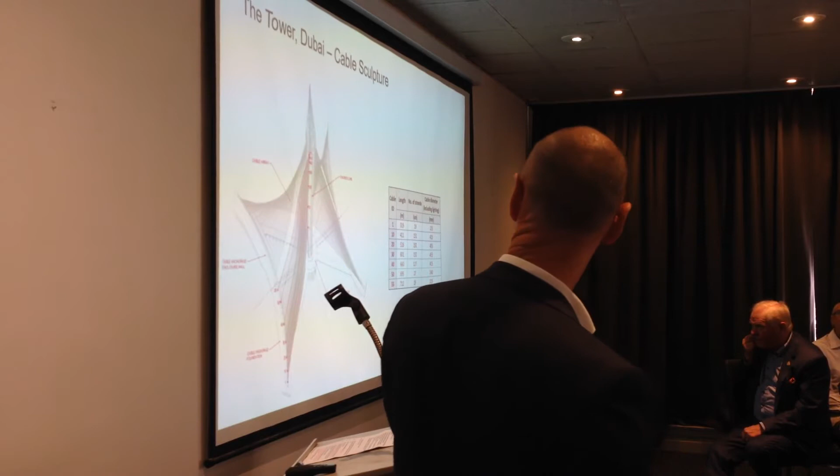There is a lot of plant and equipment, there's a lot of safety spaces, lift houses and the like. The bud section is around about the equivalent of a 50-storey building. And there are 2 floors up there that are unallocated. I suspect that will be a penthouse for the royal family. This is a bit of a complicated diagram. The point I wanted to make is about the sculptural work done by Calatrava in creating the form of this structure.

There are 208 cables that support the tower. So the tower is a bit like a lollipop in a way. It has a very thin shaft, and then it has a larger section on top, and it has 208 steel cables holding it up. It's a bit like a suspension bridge, but vertical.

And those cables, as I've tried to show in red, are placed actually not to make it more stable, but completely due to aesthetic desires. So Calatrava actually placed all of these cables to look like a harpsichord that had been bent out of shape, and secondarily so that images could be projected onto the array of cables, so that standing about a kilometre away you would be able to watch a movie on the cable array, and I'll show you something about that later.

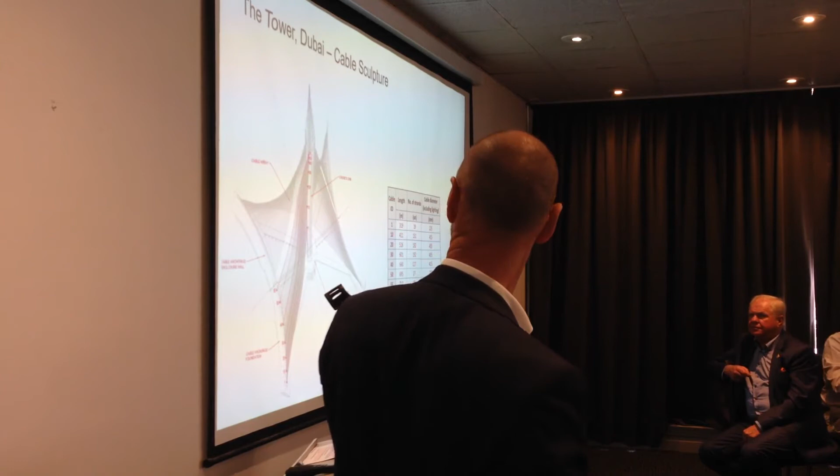So there are 208 cables that hold this thing up. The biggest one is 450 millimetres diameter, so about like that. Very large pieces of steelwork. The core section is 27 metres in diameter, and the shell, the concrete shell which that is made from, is 4 metres thick all the way around. So it's like a very large donut, or a donut stack, if you like.

At the base of the tower, obviously there's beautiful landscaping and water features, but the water features serve more than just a visual purpose. The water features are actually there as a security measure. You could imagine that this thing might be the target of terrorist attacks. It will be a very visible asset in the Middle East, which can be volatile from time to time.

And one of the ways to protect structures like this is actually to make it impossible to get to the supporting components. So actually, the water protection is of a size and disposition such that you actually can't drive a truck or a car anywhere near the base of the supporting cables.

We actually analysed the tower so that any 3 of the 208 cables could be removed or damaged at any one time, and the structure would still be stable. That was as a result of the security assessments that were done.

At the base of the, sorry, you may not all be able to see it, at the base of the tower there's an enormous concourse. So there's a 500 metre diameter, 30 metre high concourse underneath the tower plaza, which is filled with botanical gardens, reception, entry and exit to the tower, retail, food and bev, all of the things that you would expect to see in Dubai. This is an image of that arrival space.

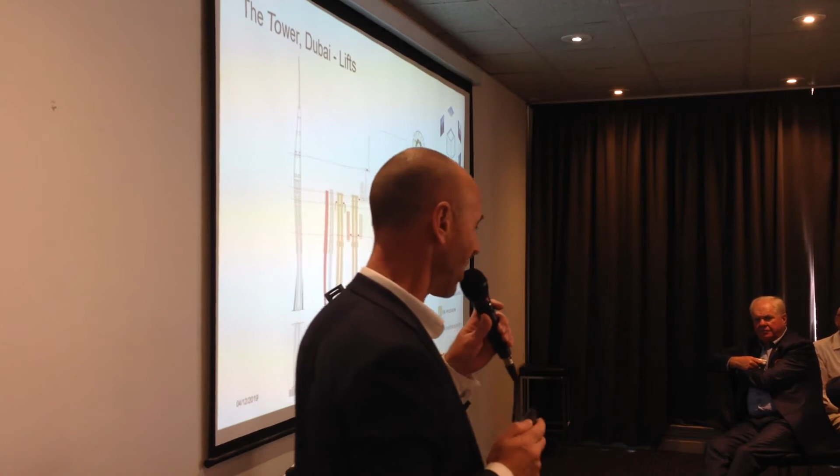In terms of lifts, getting up to the top of the tower takes some time. It takes about 2.5 minutes. We actually could have done it in 1.5 minutes, but the client said, no, actually I want it to take longer. Up in the top right-hand corner, I've tried to show each lift is a 360-degree media environment. So you have constant videos going along, and Emaar wanted to have 2.5 minutes for tourists to be able to see the full story of Dubai over that period of time. 1.5 minutes wasn't quite going to be long enough.

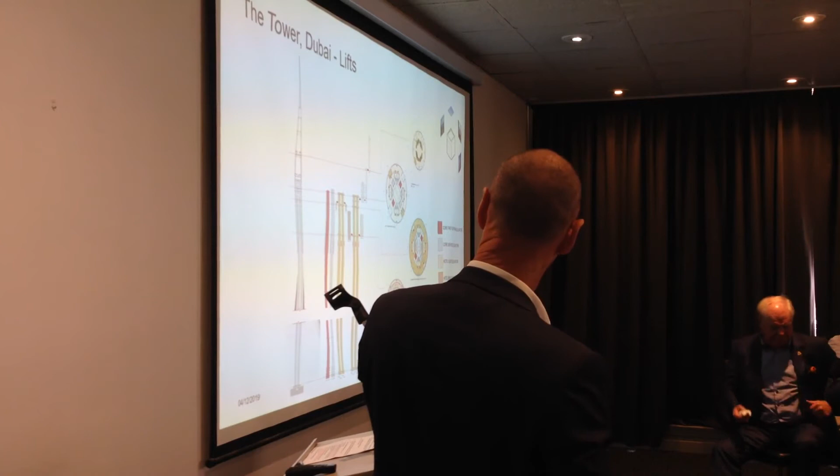So they actually asked us to slow the lifts down so that their patrons could have a little bit more time. There are 8 primary lifts in the core of the building, so that takes you up to about 900 metres. You then transition to separate lifts which then go to the outside of the bud area, so they're glass lifts that track you up to the observation deck, and that's where you start to enjoy the view.

Now this is really frightening. If you've got a weak heart, this is not for you, but for an extra fee, you can see on the right-hand side, you can enjoy an experience of being on a rotating balcony. So you can enter the balcony inside the building and it will rotate to take you outside the building envelope.

What might not be immediately obvious is that you're in a complete glass shell. So you're standing on a glass floor, glass in front of you, and actually no lid on top of you. So you would be 900 metres in the air, able to see straight down through your feet. So better than any theme park ride that I can think of.

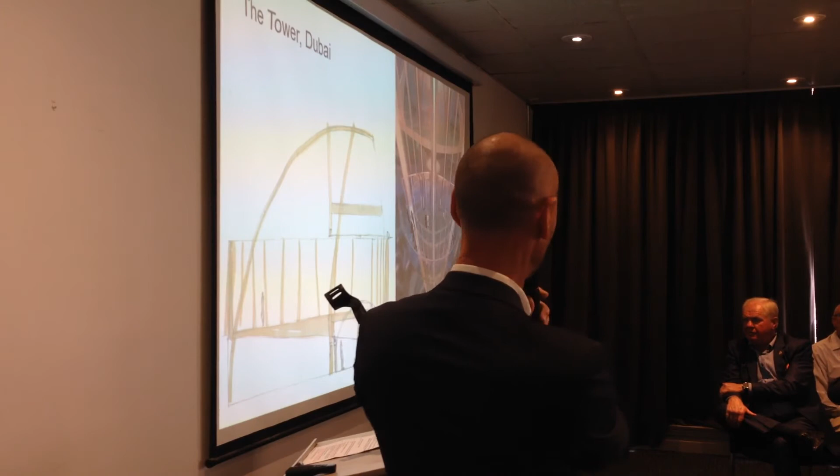I wanted to show you some of the beautiful sculptural sketches and watercolors that Santiago Calatrava produces. The way he works is he produced the sketch on the left, which is the rotating balcony sketch. That's actually 3 views of the rotating balcony. It's a plan, a cross-section and an elevation, all in one. He thinks always in 3 dimensions.

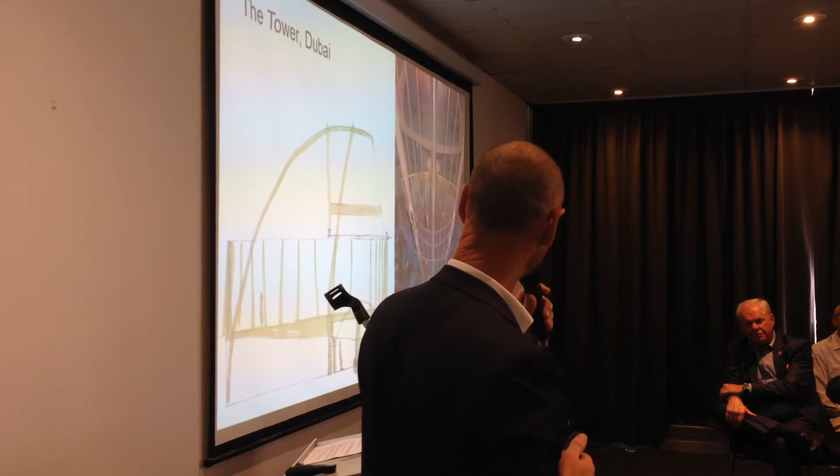He sketches, paints it in a beautiful watercolour, and then his team translates his artwork into drawings and specifications that can be built. It's really quite an amazing process. The sketch on the left is worth around about $2,500 US.

His son, Micael, who I work with very closely, tells me that he has some 100,000 sketches of a similar type. When his father retires, he has no intention to carry on the business. He doesn't need to. He can just sell a couple of sketches every week.

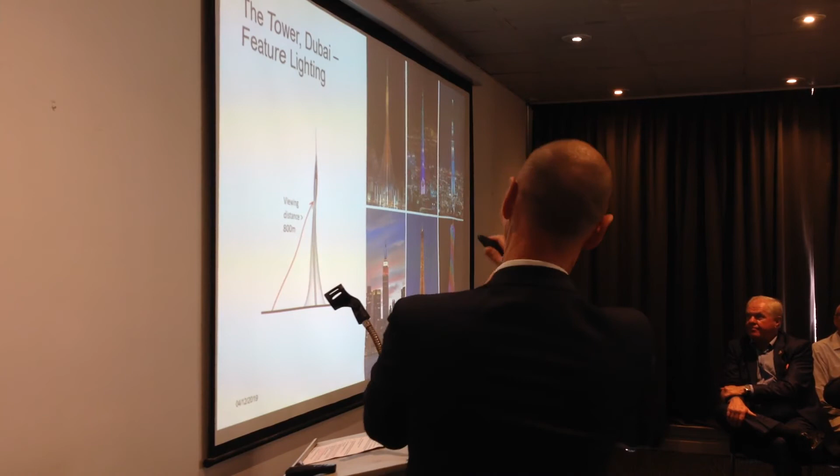This is the light feature that I mentioned earlier, similar to what does happen on other very tall buildings around the world. Light shows, movies, animations can be projected onto the cable array. So it's perhaps not brilliantly shown, but on the top left is this tower, some of the other buildings, Burj Khalifa and Eiffel Tower and so on, that have similar things.

So actually, the entertainment value or the projection of light onto the tower building was an enormously important part of getting the design right. Obviously, in an emergency, being able to get out of the building is also enormously important, but you're a long way up.

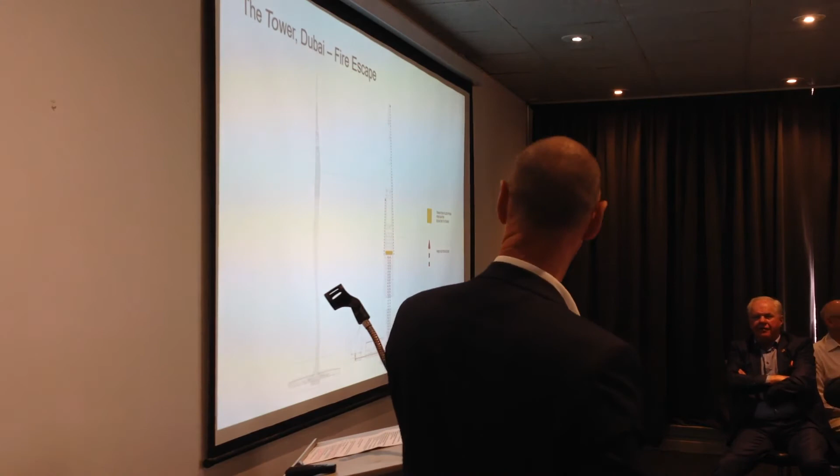There are a number of refuge floors at the top, so if there's a fire or some kind of emergency, you can take refuge, but eventually you've got to come down. We did a number of studies on this because clearly that's a difficult thing to do. Unfortunately, we estimate it will take, depending on your fitness, between 2 and 6 hours to descend down through the 5 stairs in the core. I suspect some people having to do that might not ever make it.

I wanted to talk a little bit about wind effects at the top of the tower. We spent a lot of time, as you might imagine, trying to model the way this tower would respond to the various wind effects. And a lot of that is not only due to its height, but it's about how you apply and detail the cladding around the structure so that it effectively mitigates the wind effects rather than escalating them.

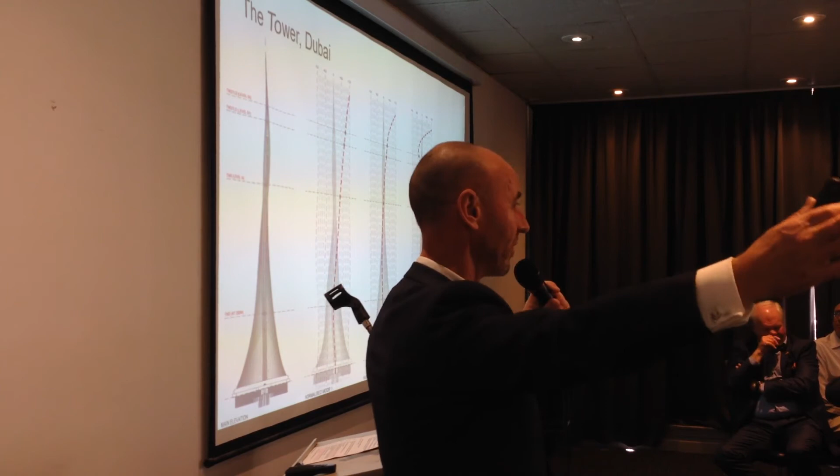But, and of course we had a whole lot of wind tunnel modelling and so on going on as well. The response of the structure to wind, obviously, is key. The natural frequency of response varies depending on which mode of response. There are many modes. The higher up the number of modes, the less impact they have. But usually the first 8 to 10 modes are key.

Mode 1 is a simple, traditional cantilever mode, which you might expect to happen, and it does. That happens first. But what happens in mode 3 and mode 7 is shown across the page. The spire starts whipping, and it starts to have a disproportionate effect on the structure. And in mode 7, it's like the tail wagging the dog. What actually happens is the spire starts whipping to such an extent that it drives that whipping motion down through the tower and creates forces that are unmanageable.

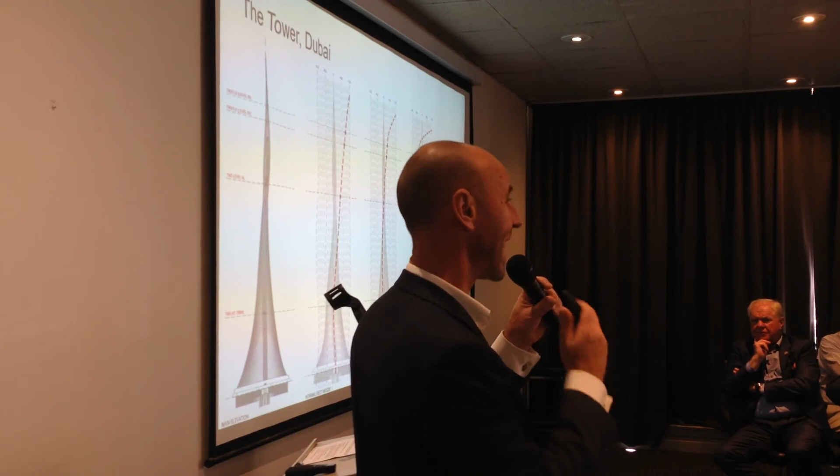So we had to use a combination of liquid dampers and mass dampers at each of those node points. We had 5 in the end in order to damp that motion, particularly the higher mode effects.

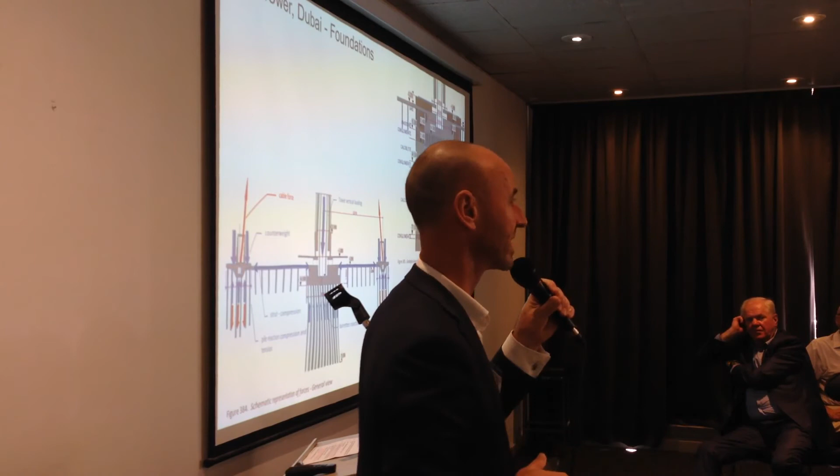In terms of foundations, you can imagine the foundations are pretty substantial. In fact, if you want to go and have a look at them, they're not that spectacular, unless you're a structural engineer. There are 145 barrette piles underneath the core of the structure. Each of the barrette piles is 2.8 metres by 1.8 metres, so it's a rectangle about the size of 2 of these tables put together. And they're not driven, they're poured down to 80 metres below ground. So we have these enormous concrete needles going down to the limestone structures deep below the sand.

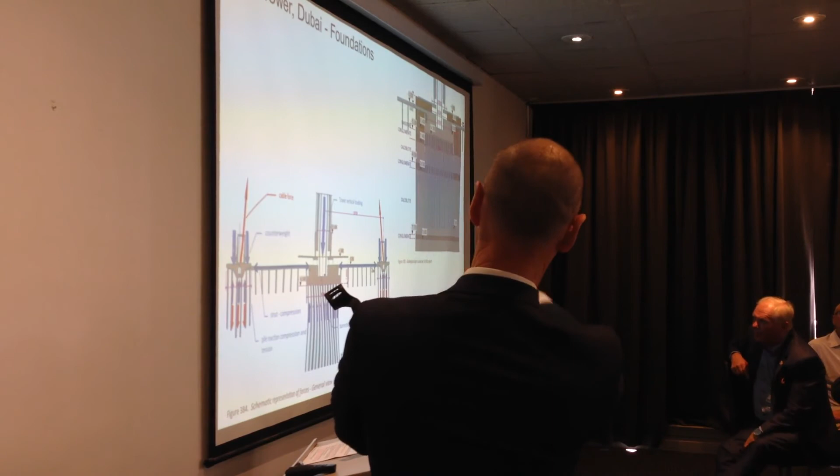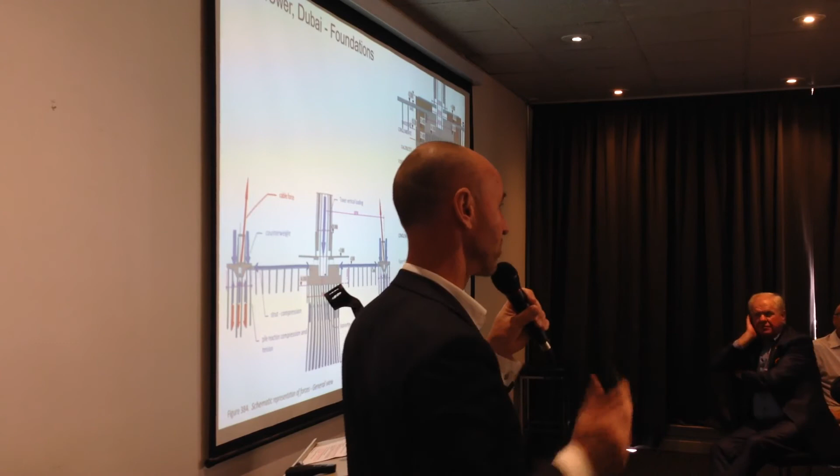I'll talk a little bit in a moment about how we hold down the cables at the perimeter of the building. We were desperate actually to make sure we had more than one way to hold this structure down, because as you can imagine, the way this structure pitches and moves, it's like being on the QE2. It can roll the way you would sense the motion, and this is motion that is at the top about 8 metres in each direction during a serviceability wind speed. So this can happen at any time. It can go up to 12 metres each way at the top in the ultimate wind event.

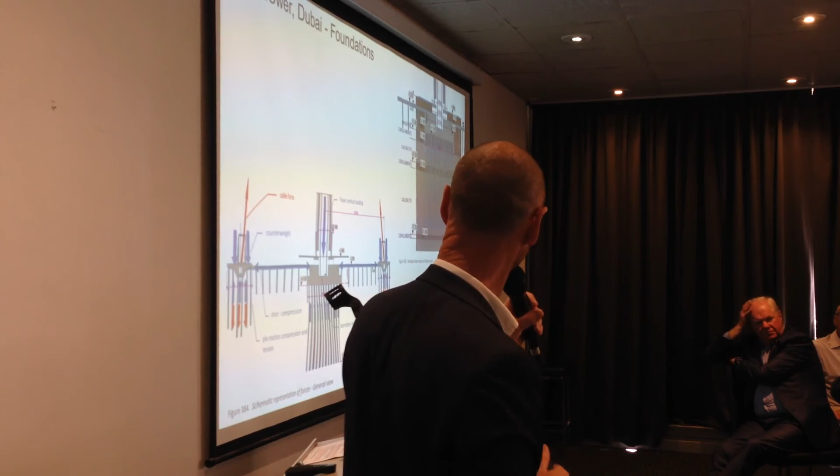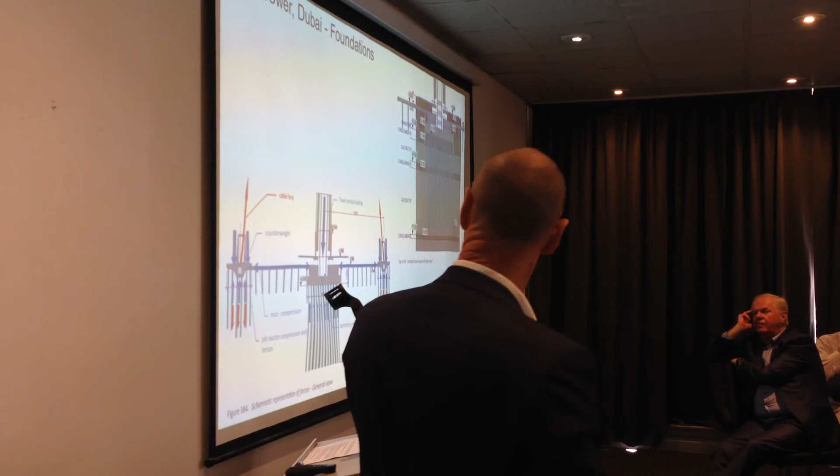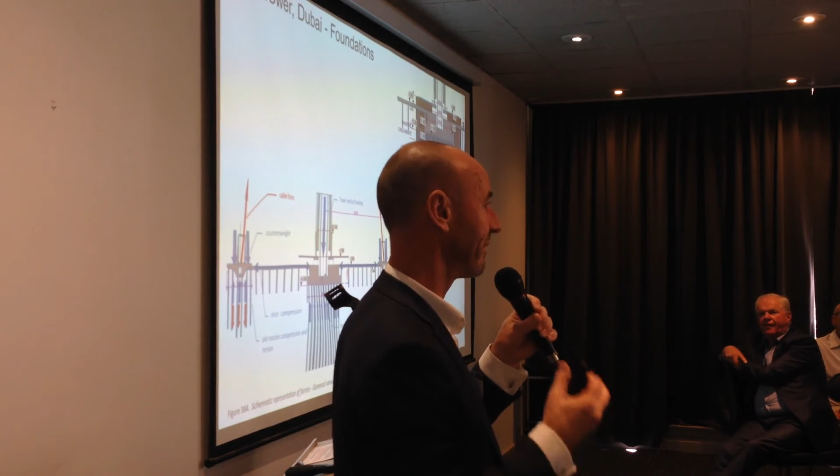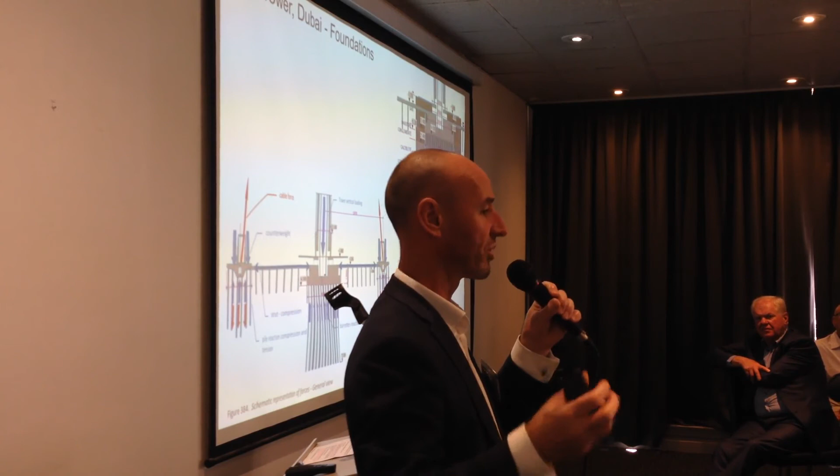It's not so much the amount that the tower moves that you feel, it's the acceleration at the top that is the key thing we perceive when we perceive motion. So actually, surprisingly, 8 metres in each direction is not that bad. But of course, to limit that, the support cables had to have a certain amount of tension, and we had to hold that down at the perimeter. In the end, rather than just using deep piles to hold it down, we also provided simply enough mass. We used actually a very simple notion of kentledge to provide enough dead weight so that if everything else failed, there was still enough dead weight to hold the cables in position.

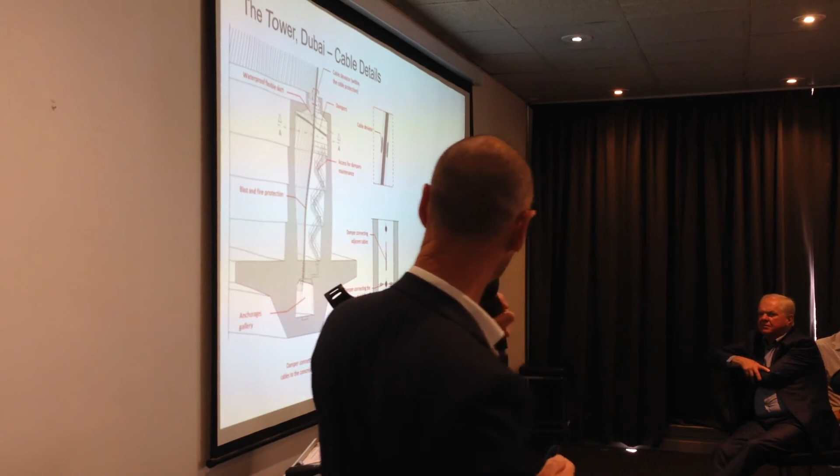Now, at the base of each cable is an enormous cable structure that is 17 metres deep. So this is about 4 stories deep, making sure that we can damp the cable motion and provide the maintenance necessary for these cables and to tune the cables so you can actually tighten these things up over time. And that will happen every year.

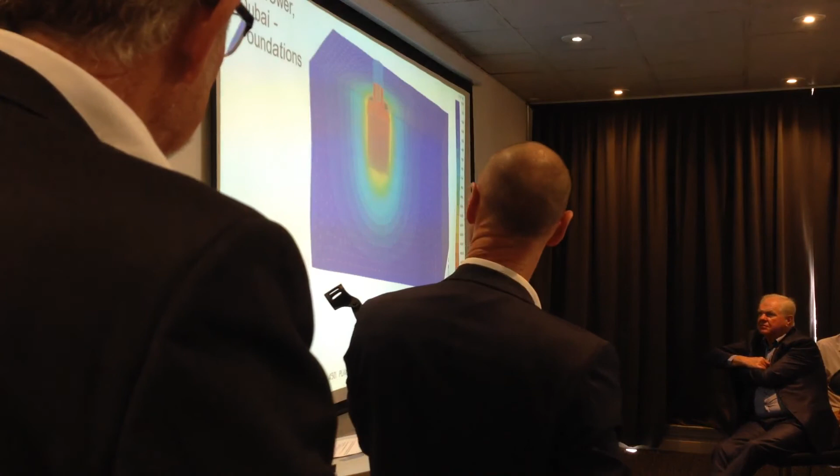I'll move quickly past that because I can feel Chris just behind me.